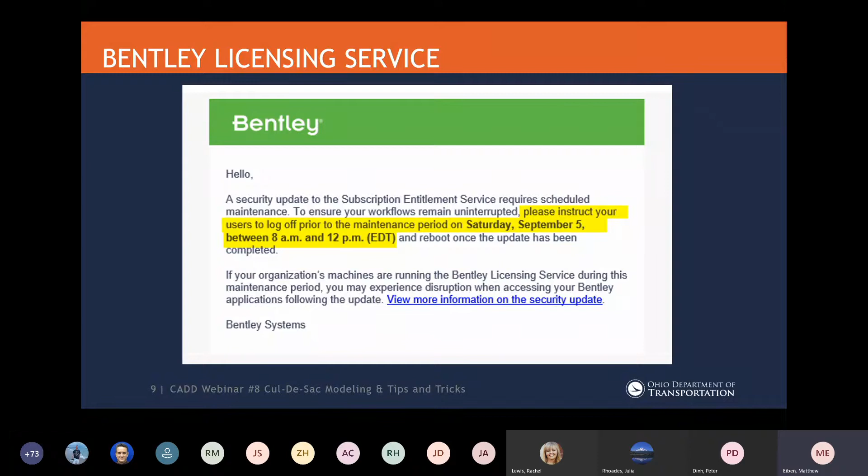Okay, so on to the cul-de-sac modeling. I don't have a whole lot of slides to go through. I'm just going to jump in and show some video here. Just an overview of the tools or the process that I use to create this. Obviously, with ORD, you need your horizontal and vertical geometry for your roadway. Then we're going to have some roadway template and get to that in a second. We'll create a corridor, which I've skipped in this review, but you need a corridor created.

And then what we'll do is we'll define the center of the cul-de-sac. So we'll have some tools that we can use to create that. And then we can construct and profile the cul-de-sac edge of pavements. So we'll create the horizontal geometry for the edge of pavements, and then we'll give them some profiles. And then we'll create a cul-de-sac terrain or surface terrain and apply a surface template. And then lastly, we would apply a linear template for the shoulders and end conditions. So let's get in and take a look.

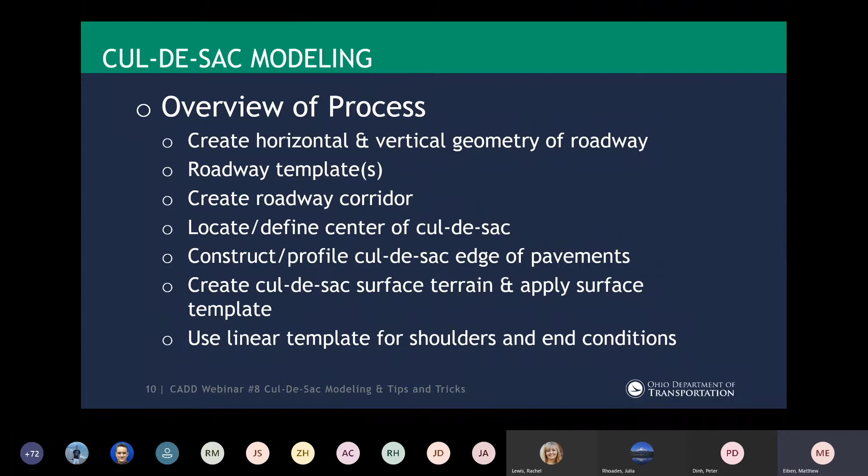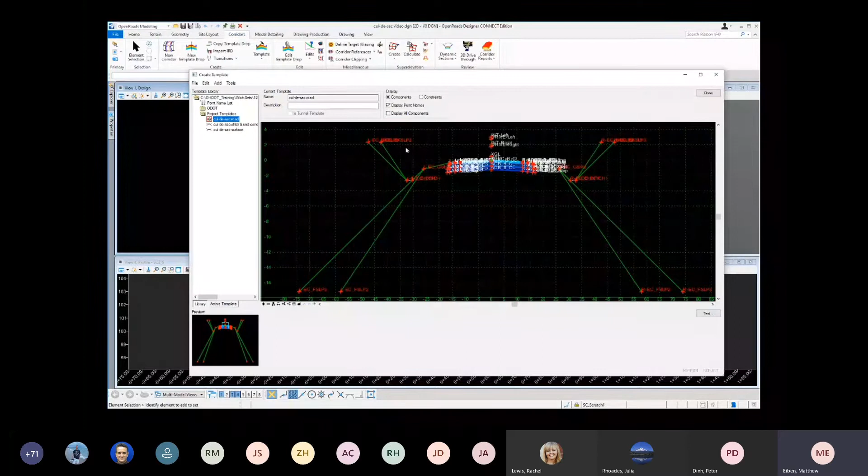We're going to take a look at two different examples, a standard cul-de-sac and an offset cul-de-sac. There are some assumptions being made that you are familiar with the basics of OpenRoads Designer, horizontal and vertical geometry tools, creating and modifying a corridor, as well as creating and using a linear template and a surface template. I've already created a couple corridors and templates that we're going to use. And if we take a look at my template library, I have a simple roadway section, a shoulder section with some end conditions for my linear template, as well as a basic pavement build-up section for my surface template.

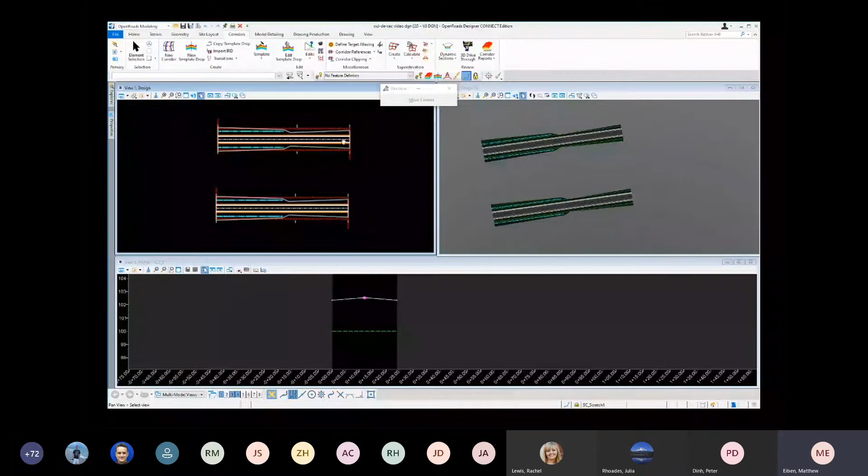So let's get started. I'm going to go ahead and slide my view to the right, where I have two new corridors already started waiting for us here. The first thing I need to do is create a center point for my cul-de-sac. And what I'm going to do is use the geometry point command to place the center point.

So one thing to note is when I do this, the Ohio DOT standard did not have a great feature definition to be used for something like this, and that could be a possibility to add in the future. Maybe some sort of scratch point that's going to be visible. But I'm going to leave this set as no feature definition for now.

And then if I take a look at my active symbology, I'm going to make this something that I can see easily in my view. So I'm going to make it a color of 4 and let's say a weight of 8 or maybe even 10 would be easiest to see. My elevation mode is going to be set to plan element. That way my point will come in at the elevation of the profile along my center line.

So I'm going to go ahead and locate my plan element. My elevation offset is going to be 0, and then I need a data point where I want this to be. So I will snap to the end of my line. And now you see I have a yellow circle in both my plan and my 3D view.

So now we're going to use this center point to create the edge of pavement for our cul-de-sac. And using my feature definition toggle bar, I'm going to set my active feature definition to the edge of pavement feature definition. And now I'm going to use an arc between points. My placement method is going to be a center and a radius, and my radius value is going to be 50.

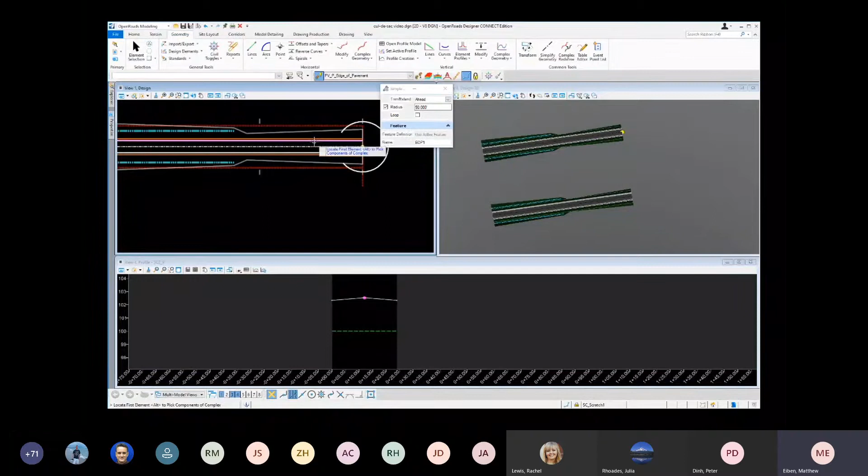So I'm going to accept these prompts, and I'm going to just pick 2 points and create the back part of my cul-de-sac here. Next, what I'm going to do is use an arc between elements, and I'm just going to place a 50 foot radius to connect the two from the edge of pavement from my corridor and the cul-de-sac edge of pavement that I just created.

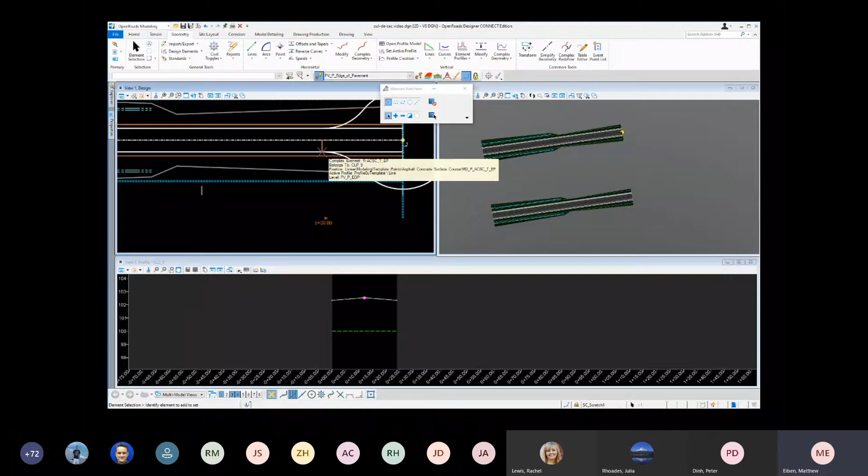And I only want to trim the ahead element here. I want to leave my corridor alone. So I'll create this on each side, and it'll automatically trim back the extra from my cul-de-sac edge of pavement. Now I'm going to just pull back my template drop for my corridor to the beginning of these first radius here. So now it's a little bit cleaner for us to work with here.

Now we need to define profiles for these 3 elements that we just created. So I'm going to start with the back part of the cul-de-sac, and I'm going to open a profile view for it. Although we don't really need to, I just wanted to show what's going to happen when we use the define profile by slope from a point command.

So when I do that, I'm going to define the profile of this point, and I need to select the point from the 3D view now. And I'm going to use negative 1.6% slope. So a profile is created and it's automatically set to active in my 3D view. Next, we'll create a profile for the radius returns that we created.

And then I'm going to use the profile intersection point command to have the edge of pavement of our roadway and the edge of pavement of the cul-de-sac defined in my profile view. And then we'll connect the points to create an active profile for that edge of pavement. So one point is placed here, and then I select the other, and now I have 2 points here. Now I'm just going to use a line between points and connect the dots. And then I'll make this profile active.

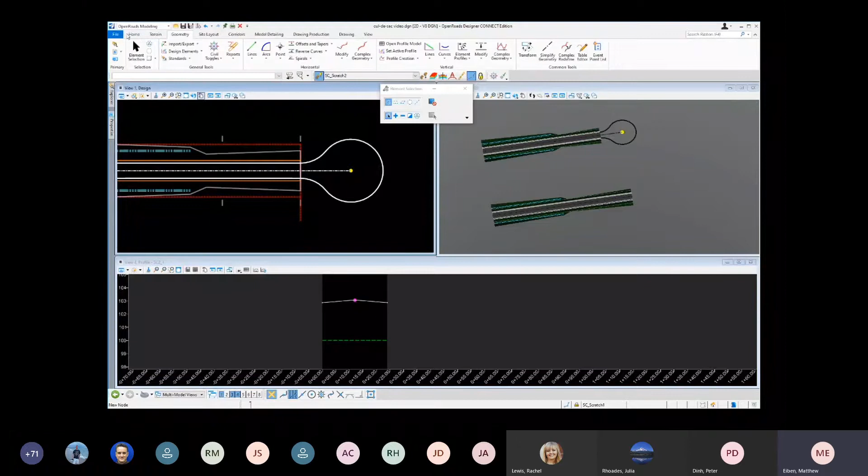So when you use the scratch feature definition, it's a little bit difficult to see, especially in your 3D view, what elements you have here. So one little trick you can do is go to your Home tab and go to Manage your element templates, which is what the feature definition pulls from. If I look at the Scratch 2 element template, it's just all set to the standard by-level symbology.

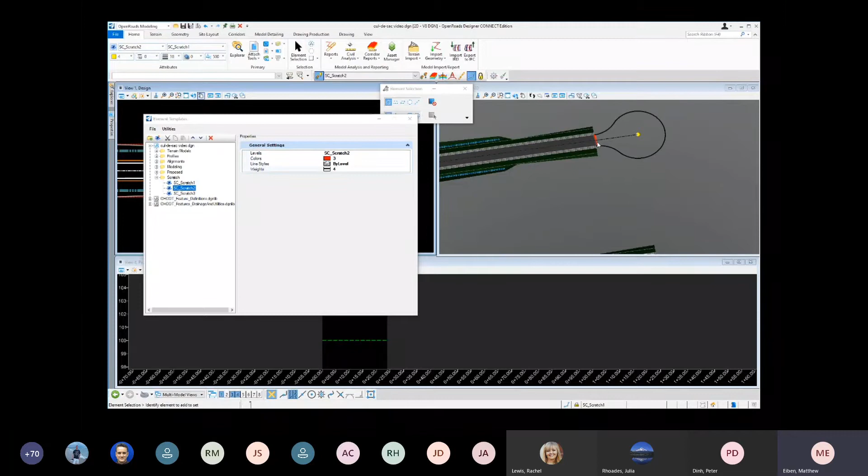So if I change this maybe to red and maybe a weight of 4, so I can see it, we can see in our 3D view that has changed. Just a little bit easier for us to see, as well as in the plan view, it's also changed.

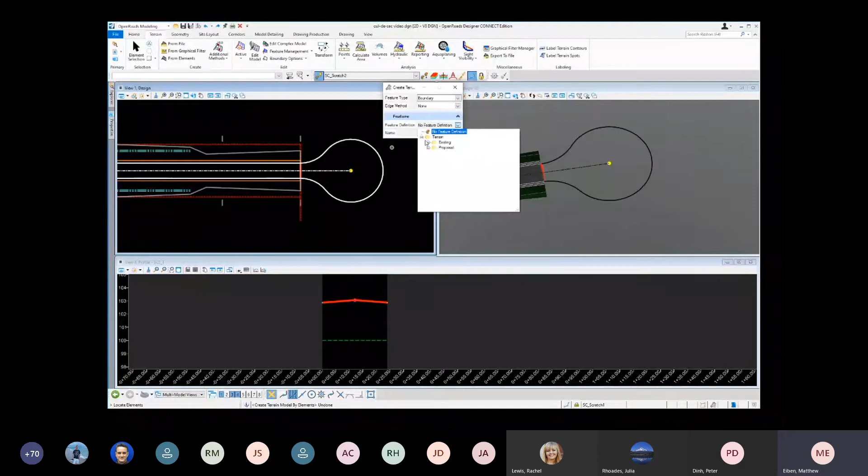And now we're ready to create a terrain of our pavement surface, and then apply our surface template to that to add our pavement build up to apply the depth to it. So we will start by going to terrain and use the create from elements command. My feature type is going to be set to boundary, and my edge method will be none. I also want to set my feature definition to proposed pavement surface. And then I'm just going to select the 4 elements that we just created.

And notice I get a couple contours here, but I still need to add in the break line. My center line is a break line to make the contours appear more like what you would expect to see here. So I'm going to go to feature management, I'll add a feature. From my 3D view, I'm going to select my terrain, and then I'll select the center line to add as my break line. And now you'll see those contours appear much more like what you would expect.

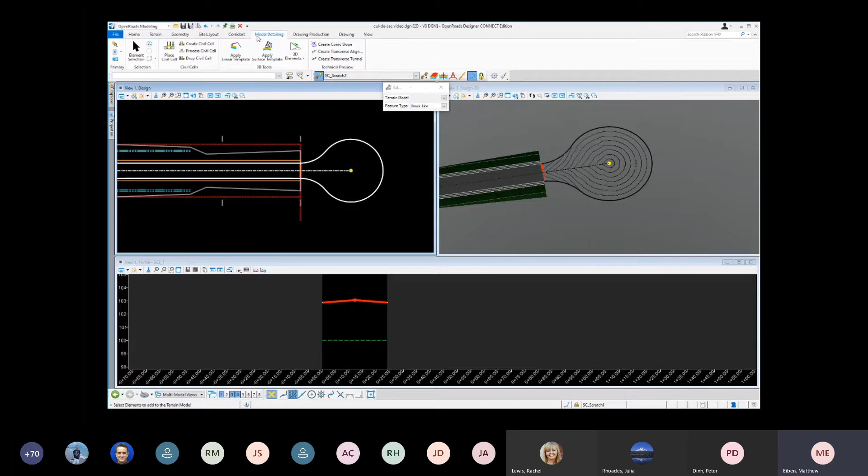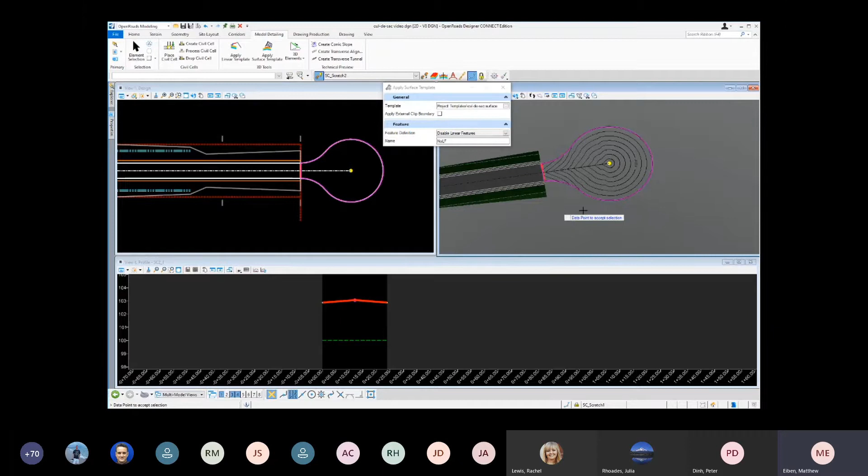So we're almost done now. Next thing we want to do is go to model detailing, and I want to apply a surface template here to apply the pavement buildup to the terrain that we just created. I'm going to use the cul-de-sac surface template in my template library I showed earlier, and from my 3D view I'm going to select my terrain and then just data point through the prompts, and now you can see a pavement buildup was applied here.

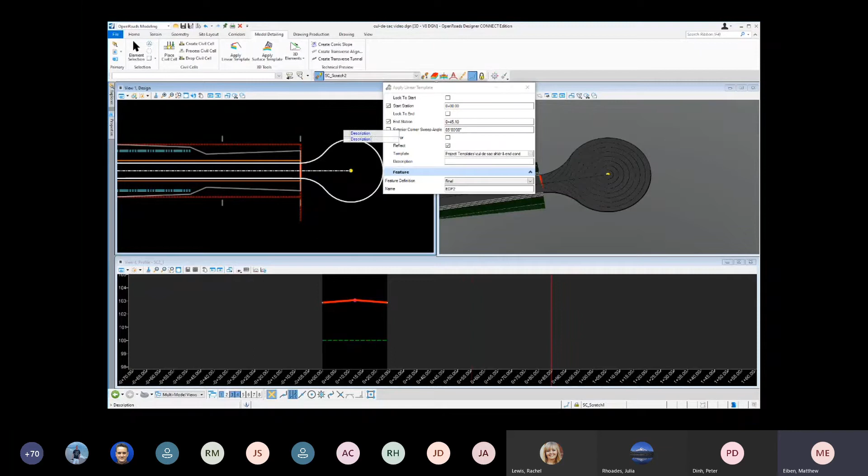The last thing to do to finish this cul-de-sac out is apply a linear template to each one of these edge of pavement elements that will apply the shoulder and the grading end conditions to these pieces here. So there you have a simple way to model a standard cul-de-sac.

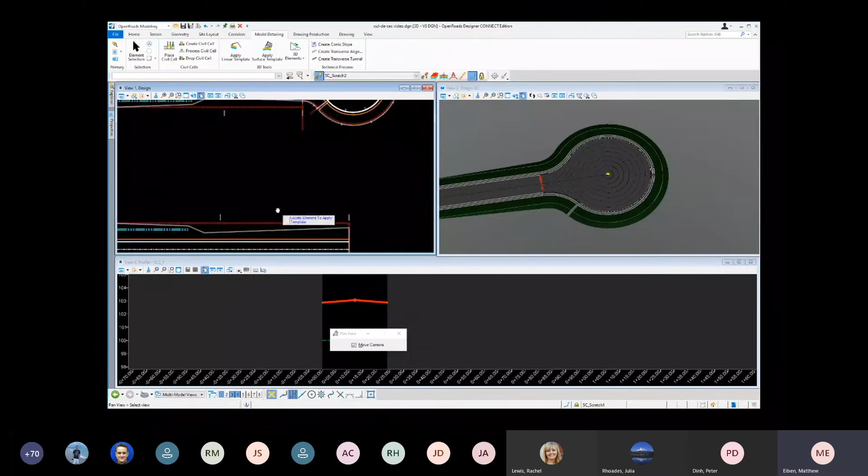So now let's take a look at the offset cul-de-sac. I'll slide down to my other corridor here. The concepts are the same in this case, except what I wanted to show was how to create a little bit of extra geometry needed to create the offset cul-de-sac, that you're also going to need to create the surface template or surface terrain.

So to do that, I'm going to keep my feature definition set to Scratch 2, and I'm going to go to my geometry tab. What I want to do is create a line from an element. I've already populated the dimensions that I'm going to need here. So I'm going to select my center line, and my offset is 0.

I don't really care where I start at this point. You may have a point that you want to start this at. This is going to be where the center is perpendicular to the center line. So you may be able to use Civil AccuDraw to locate your exact starting point. I'm just going to data point a point here, and I want it to go to the south, so 270 degrees, and I want it to be an offset of 38 feet.

Now I'm going to place an arc between points, and I want to set my method here to start and end, pass through. And then I'm going to snap to the end of this line, and I'm going to work backwards. And my radius value here is going to be 143 feet. And then my endpoint, I'm going to use a tangent snap, make my endpoint tangent to my center line. And then I'll data point through to place that.

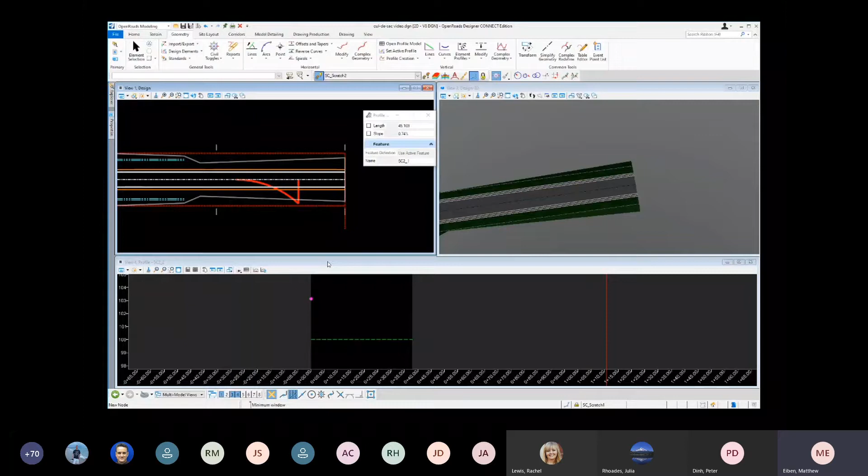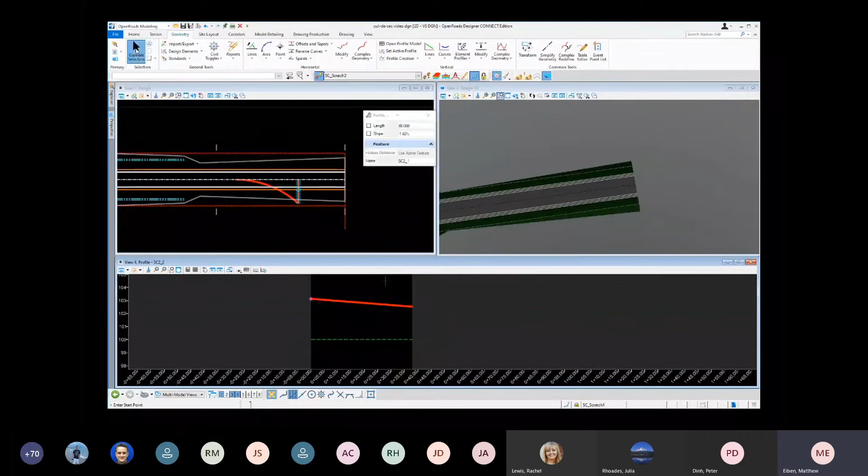I'm going to create a line beginning at that point, and I'm going to do it by a slope. So my end station is going to be 0+38, and I want this to be negative 1.6%. So then we'll set this active, and we'll create a profile now for our arced element here.

And again, I'm going to use the profile intersection point to create my centerline point as well as my offset point. Oops. And then I'll set this active as well.

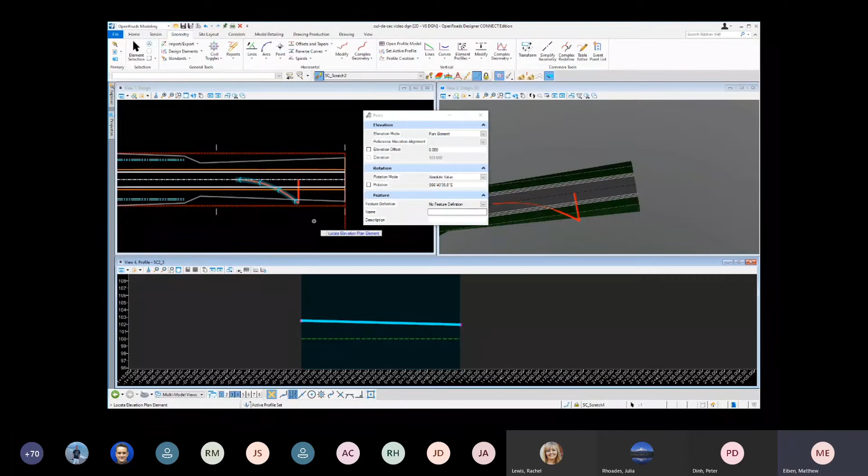And then the last thing we can do to create our center point is use the point command. And again, this is set to no feature definition. And I want to set this at the end of that center line. So now I have my center point. That point will then be used to create the profile for the cul-de-sac element, or the edge of pavement element.

Now I'm going to go ahead and create the edge of pavement components or elements here. So I'm going to set my feature definition back to the edge of pavement, and I'm going to use the same commands I used previously. I'll do an arc between points. Again, I need to change my method back to center radius, and my radius value I'll set to 50. And then I'm just going to snap to the center point. I'll just pick 2 points to create this.

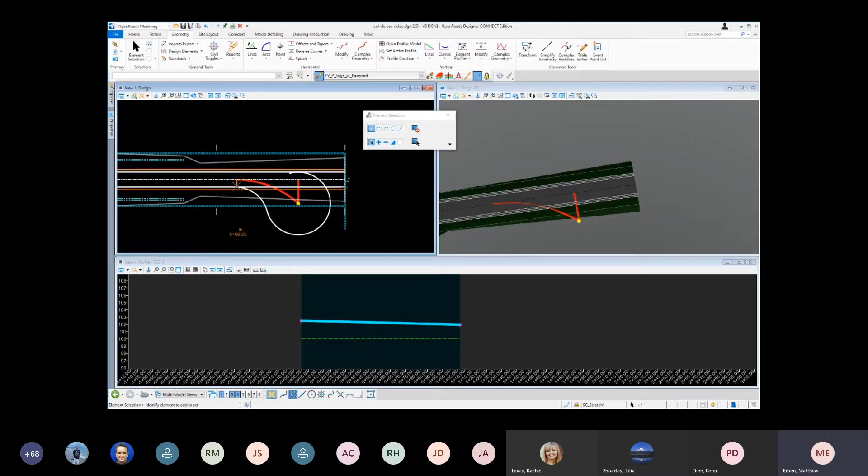And then I'll do a simple arc between elements. And again, I'll use a 50-foot radius here. Select my edge of pavement from my corridor, and then select the cul-de-sac edge of pavement. And I'll trim the ahead part of it. Now what I'm going to do is move back the corridor to the beginning of this radius, which leaves us one more edge of pavement component that we need to go ahead and place.

So what I'll do here is I'm going to use a single offset partial, and my offset value is going to be 12 feet, the same as the lane. I'll select my center line, I'll select my begin point, and I'm just going to extend it beyond the cul-de-sac there. Then what I can do is go to the drawing tab, and I can just use the MicroStation extend elements or trim elements, and trim those two together.

Then I'll also just go ahead and create the last piece that we needed to create our boundary for our surface terrain.

Okay, so now we have our horizontal geometry all created. I've started a profile for my boundary point there. And now let's go ahead and profile the edge of pavement elements. And I'm going to go ahead and set my feature definition back to edge of pavement. And then, again, I'm going to use the define profile by slope from a point. And I need to select my point from the 3D view. And again, I'll use a negative 1.6%. Now I can do the same thing here.

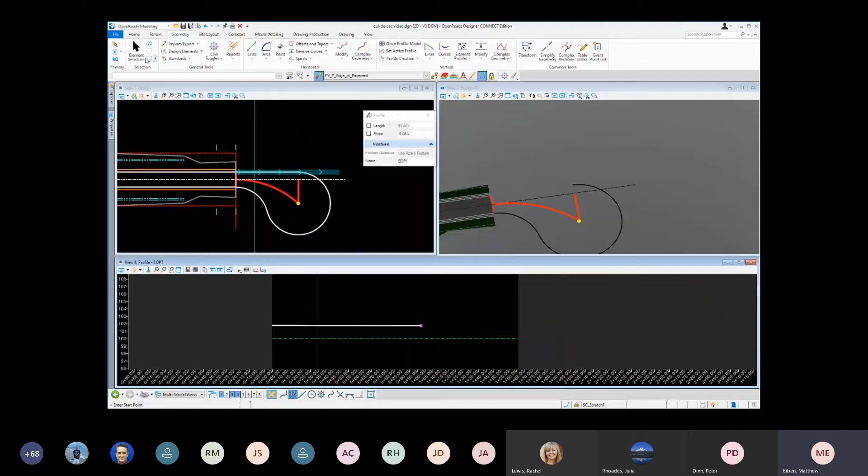Okay, now that we have all of our edge of pavements and our break lines are profiled, we can go ahead and create our surface terrain. So we'll go to terrain, create, and go to from elements, and we'll select the edge of pavement and our boundary line here. Again, feature definition is set to pavement surface, and my feature type is set to boundary.

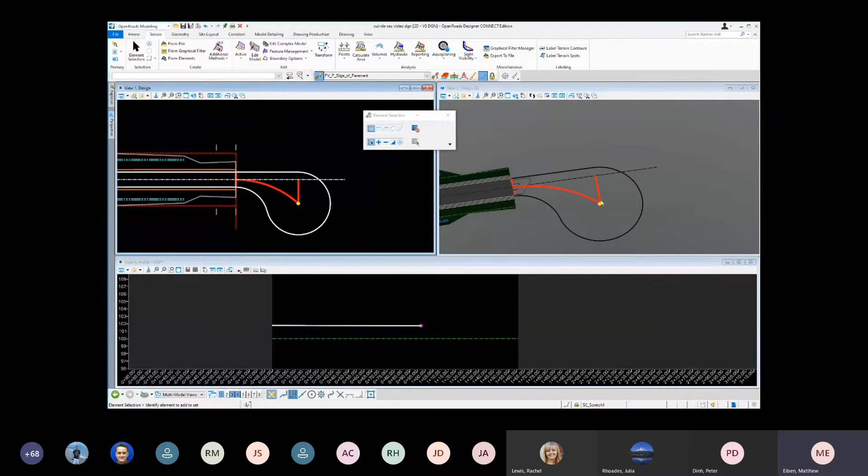So now you see a couple contours were created, but we need to go ahead and add in this last arc as our break line. So we'll add a feature, select our terrain, and then locate the break line. So there our contours look nice and smooth like we would expect. And then to finish the rest of this out, we will apply our surface template for our pavement buildup, and then apply a linear template for the remaining elements for our shoulder and our grading.

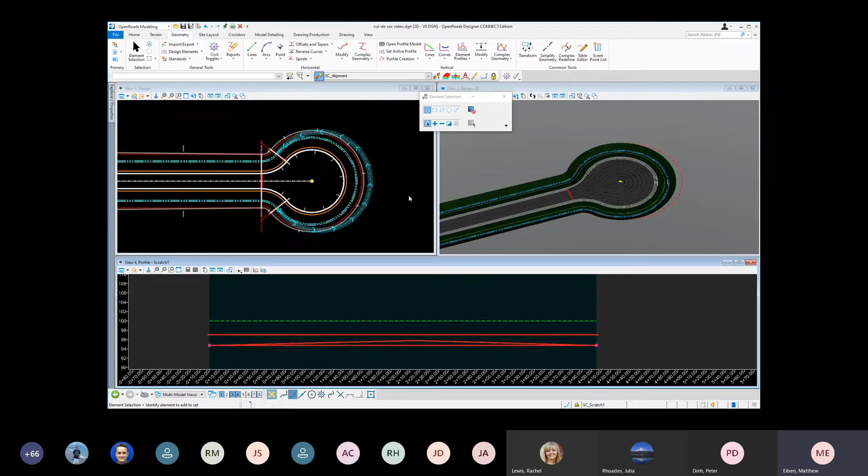Next, what I'm ready to do is go ahead and add a point control to control this both horizontally and vertically. But before I do that, I need to go to corridors, and I need to add this as a corridor reference so that the corridor knows that it's there. So I'm going to locate my corridor, and then I'll select the reference element, and then I'll just reset to complete it. So that process is pretty quick.

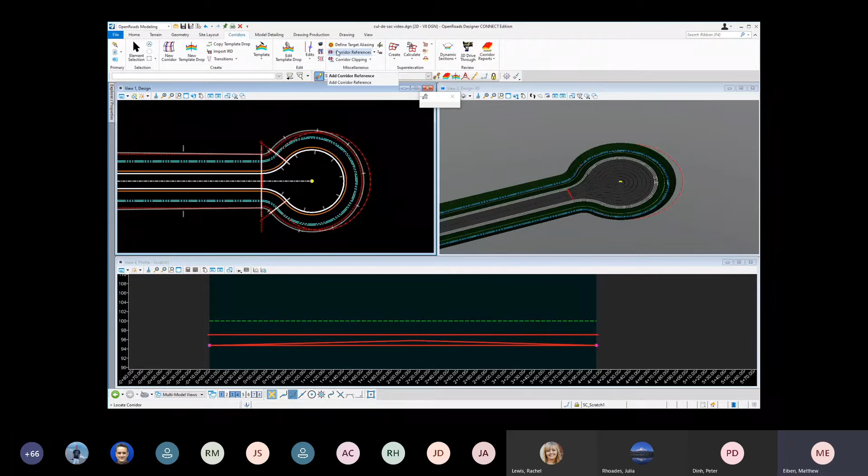In this scenario, if you had a bigger project, you might see it take a couple of seconds, but we can double check that it's there by going to our corridor objects. And if we just select or locate the corridor and look at our external reference, we'll see that that corridor reference was added in. And again, if we use a correct naming convention or something that makes better sense, we'll obviously see that name there

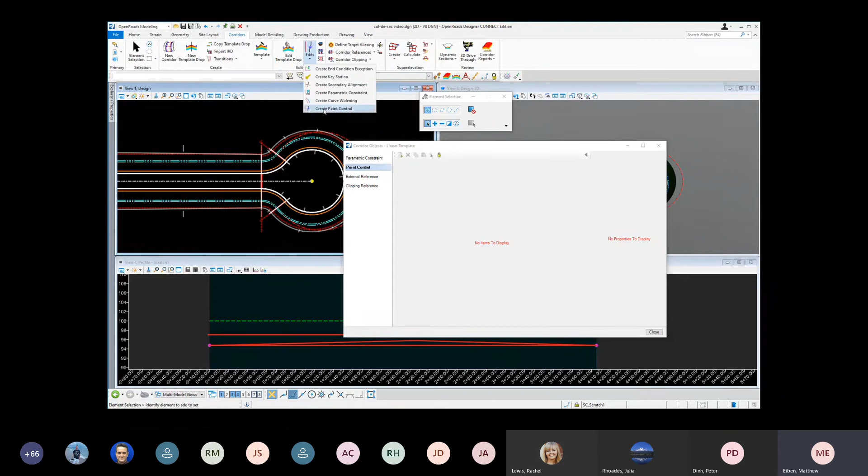as well. And while I'm here, I'll just point out that there's no point control here, and I could go ahead and add that from this dialog, or I can also go to my edits command and click on create point control. So I'm going to just do it from this dialog. And this is already set to lock to start and end for me. So I'm just going to keep those as I want, and then you can add a description as you feel necessary.

I want to locate my point now. This is the point from the template or from my end condition that I want this point control to control. So I want the inside ditch line, and notice in the dialog then the point is populated here. You could also pick from the drop-down list. Generally, it's going to be easier to locate it in plan view if you can.

Now I want to control this both horizontally and vertically. So the mode here is going to be both. Again, you can select from the drop-down horizontal or vertical. So I'll data point to accept that, and I want this to control it by linear geometry, and then I'll data point here. You have some other options such as a feature definition or corridor feature. We're going to use linear geometry here.

Next, it's asking me to locate my plan or profile element. So I'm just going to select in my plan view my new geometry here. And since my active profile is defined as scratch 3, I can just data point to accept. And once that plan element was selected, it was also populated in the dialog. And again, you could select from the dropdown and pick any of those.

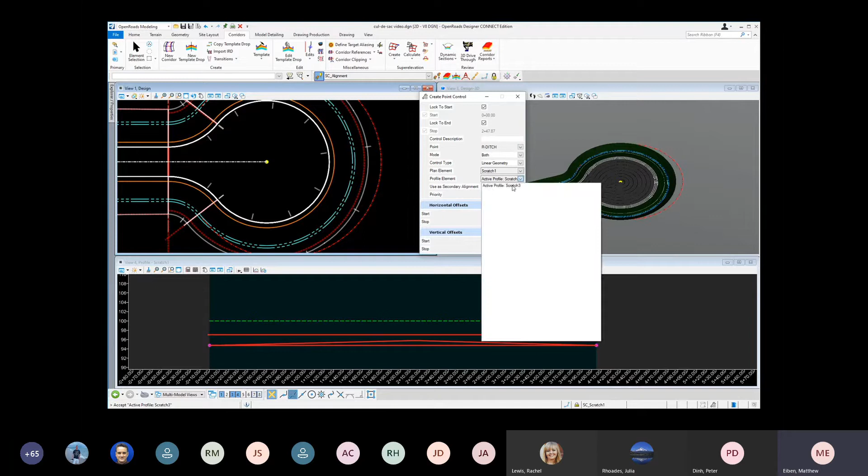And then once the plan element is selected, the profile should populate here or give you whatever options you might have. So we're going to data point to accept that. We don't want to use a secondary alignment, and the rest of these prompts I'm just going to data point through to accept. I don't want any horizontal or vertical offsets.

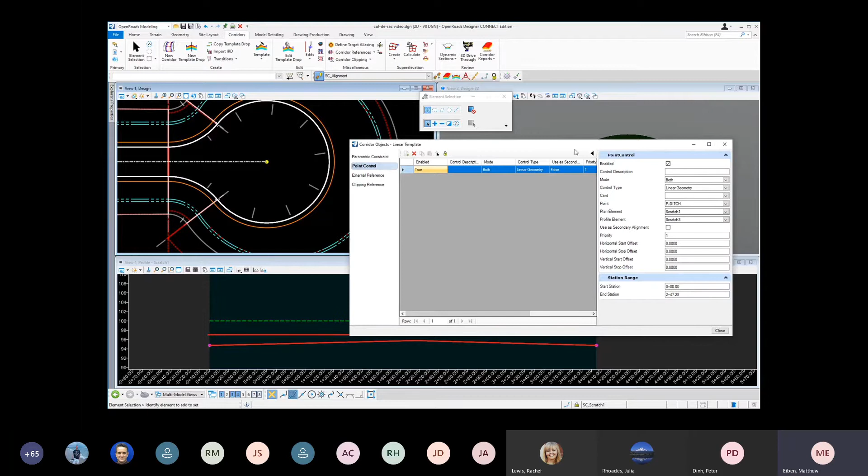So we'll see now in our corridor objects dialog box, our point control was added, and we can come in and review any of these, or we could even change any of them, or even just toggle it on or off if we didn't want to see it. So that's what I'm going to do here. So I'm going to toggle this off. I'm going to go back to our original condition, and then when I toggle this back on, you can see that my ditch was adjusted both horizontally and vertically to follow that scratch alignment that I created.

One last thing that we can do to take a look at this is if I open a cross-section view, and I'll just start a new cross-section view. I'm going to locate my corridor, select my view, and if I kind of scroll through these, you'll see that my ditch was adjusted, and because of how far this is away, obviously that really flattens out that slope there. And then we can see as we get back around the other side, as it starts coming back in closer, it looks more like what you might expect.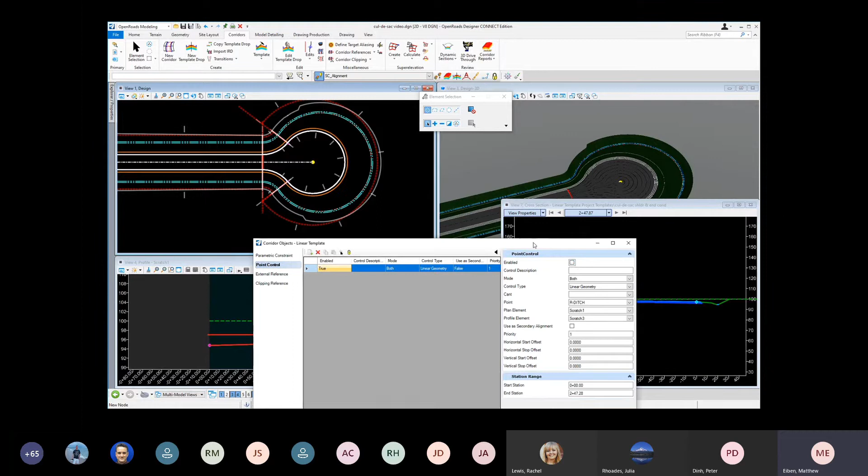Last thing is, in our cross-section view, let's say we want to toggle that point control back off. We can see, and then scroll back through our cross-section view, you'll see that the normal condition is there.

So that's one way to show or modify a ditch. And this can be done not just on a cul-de-sac, but really any corridor that we have, we can apply a special ditch profile by using the similar commands.

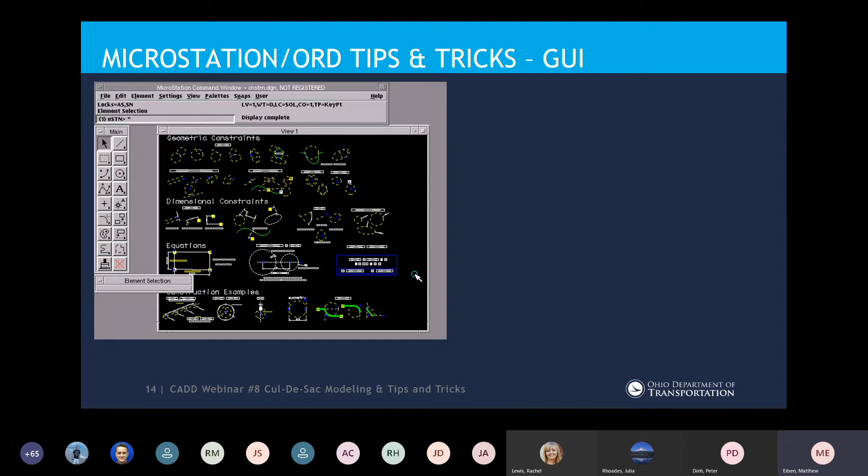Here we got a nice screenshot, and this goes back quite a while. The graphical user interface has come a long way over the years. This was the earliest screenshot I could find from version 5 from back in the mid 90s on a DOS operating system. It happened to be the first version I briefly touched until MicroStation 95 came out, which was like version 5.5 on a Windows operating system. So that was that there.

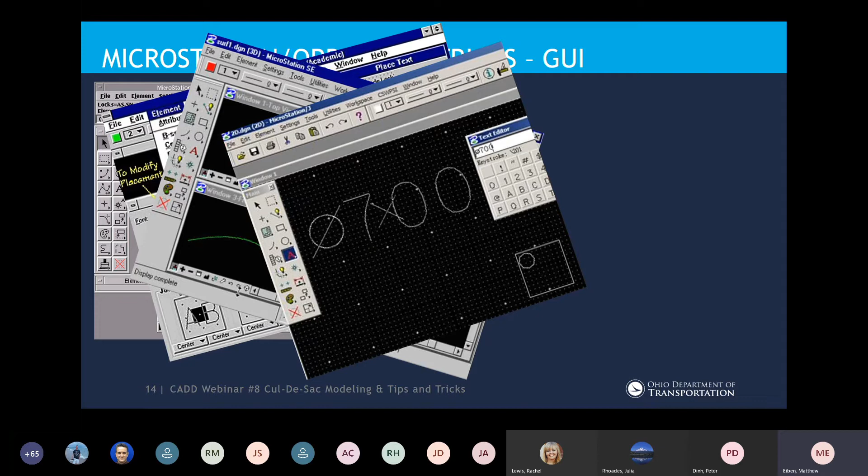And then we had MicroStation J, or version 7, and the interface mostly remained the same in all of those versions. There's SE, then J, and then we get into the 2000s. We had version 8.1, which I couldn't find a good screenshot of, and then 8.5, which is also called the 2004 edition, followed by 8.9, which is the XM edition. Again, the interface mostly remained the same, with the main toolbar always docked over on the upper left.

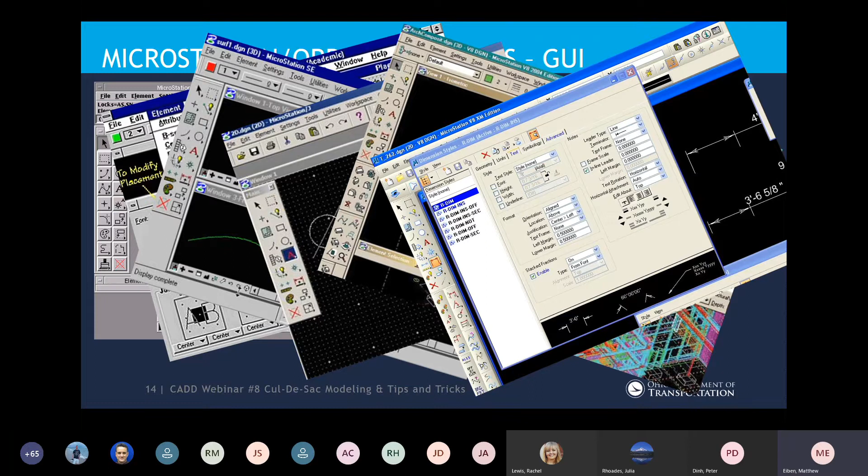And then finally, we get to V8i, where the main toolbar was still available, but largely replaced with the task toolbar, which is what I think most users will recognize prior to Connect Edition products. So now we have the ribbon interface. But why do I bring all these up? Just to show the progression of the interface, the task dialog, the ribbon interface, which brought the biggest change and seemed to worry and frustrate users.

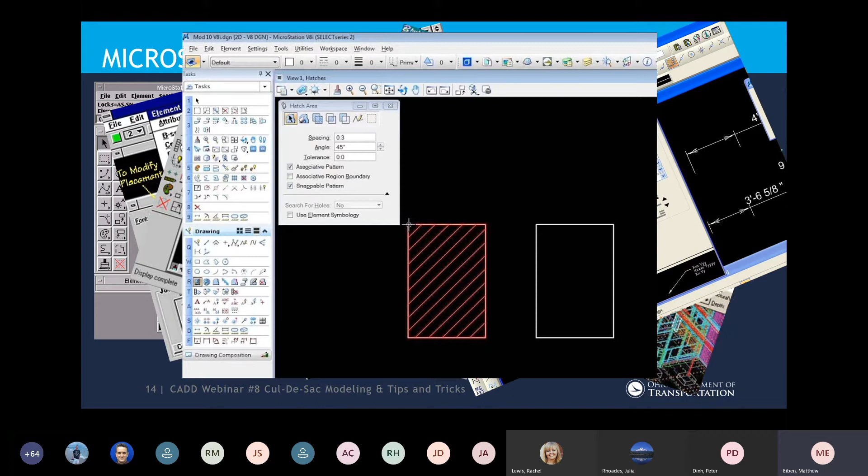They feel like they won't be able to be as productive, they might have to find where things are at. So I'm just going to show a couple of tips and tricks for MicroStation. When I say MicroStation, that also includes ORD as well. So hopefully you learn something new, or maybe it'll just be a refresher. So the first one here.

Now let's say you're working on your model, but you just want to place a cell real quickly or something, maybe place a line, and you don't know where the cell command is, you don't want to navigate away to go find that. So you can use the search ribbon in the upper right for a couple things. When I type in cell here, you'll see it shows me where the cell command is located.

In this case, I have 4 different menus. By clicking on one of them, it'll take you to where the workflow is located. And we can also use the ribbon just to activate the command. So if I select on the cell here, it'll bring up the cells dialog.

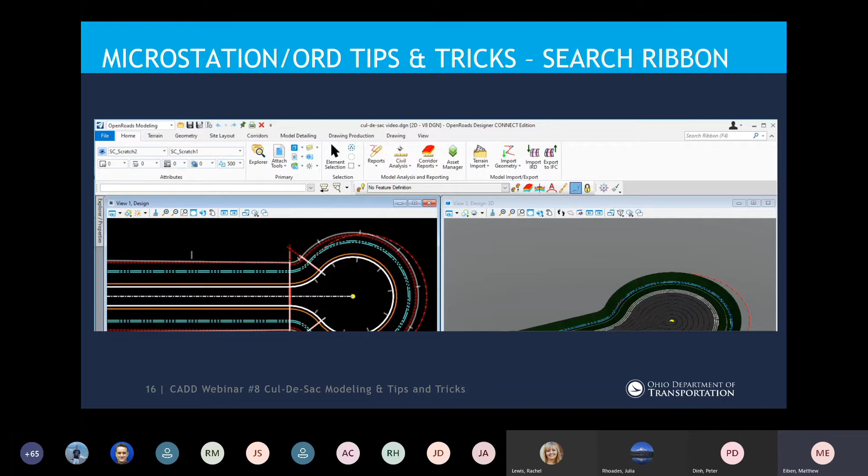And I don't show it here, but there was also a history that will show your list of recently used or your searched items that you can go back to and look for later. So the search can be helpful in a couple of different ways. You can find a command to either open it directly or to find where that's located in the ribbon menu there.

So now we've talked about searching by a KEYIN. Let's take a look at some actual KEYIN commands and shortcut KEYINs. What I'm talking about is actually using the KEYIN dialog box and not necessarily keyboard shortcuts like Control E or any of those sorts of things. So I did just want to share these, give you another way or ways to navigate and potentially avoid getting lost in the ribbon. In some cases, you might find some of these KEYINs helpful, other you may not.

Generally speaking, KEYINs aren't used as much as they were by users in the past, and why is that? It's just as we looked at earlier, the graphical interface of the new versions has improved, and users generally have learned where their top 20 commands or so are, so they're comfortable finding those and may have even customized their user interface, whether it be a custom toolbar or just docking the toolbars they use most often.

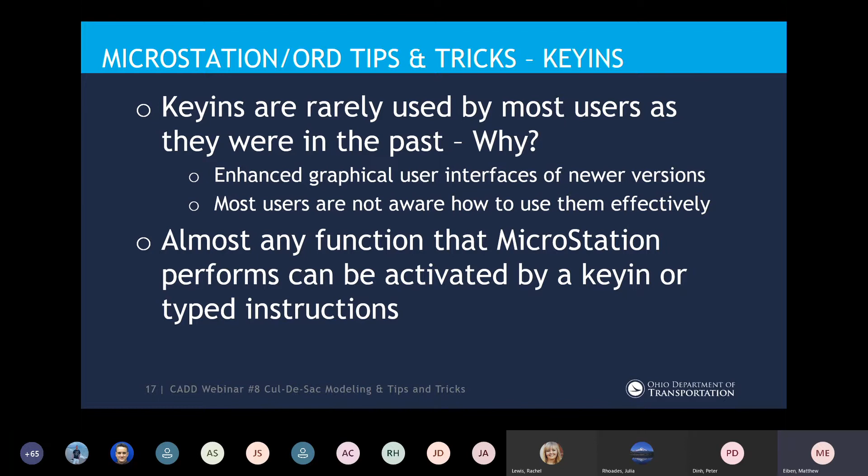But I'd also say most of the time, many users that I talk to don't really know how to use KEYINs effectively. So just about any function that MicroStation performs can be activated with or manipulated with a KEYIN. And when might you use those? It's going to be definitely useful as you do repetitive tasks. And we can also use KEYINs to take advantage of shortcut KEYINs, which are reduced to 2 letters. So we'll look at a couple of those here in a minute.

And we can set commonly used KEYINs to function keys to further increase your productivity. So if you always use 1 or 2 commands, we can find the KEYINs for that and set it to a function key or even create a custom menu. You can also search the MicroStation Connect online help for a list of KEYIN commands with the link that's here.

And what I show here is all the Bentley help content is now online rather than built into the product. So you can use that link to get to the product documentation and choose the product you're using. I've noticed in general, for MicroStation commands or KEYINs, the documentation is much better using the MicroStation help rather than the ORD help, even though ORD is built right on top of MicroStation.

So KEYINs can be combined with a semicolon, so we can do several things at once. KEYINs individually or combined can be used in a batch process. I'm not going to talk a whole lot about that though today. So alone or together, for someone like me who really isn't a programmer, you might find something that you do a lot can be combined and automate your workflow with your own little script.

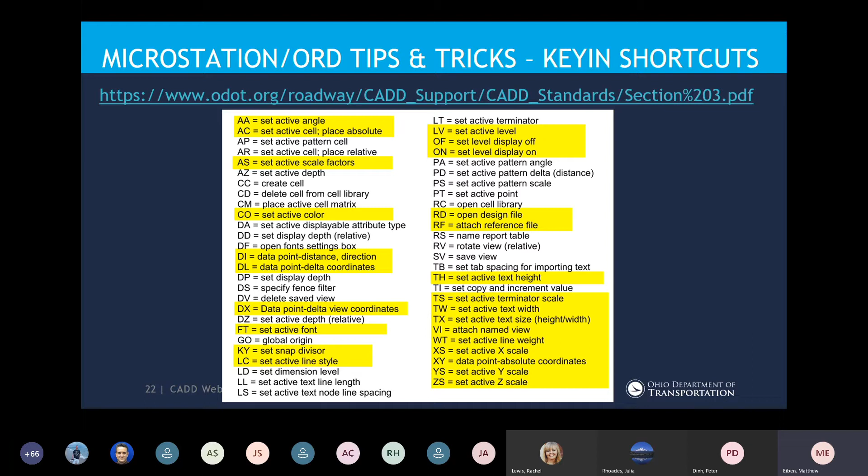The highlighted shortcut KEYINs are what I'd say are probably the most frequently used. Some of the text and symbology ones may not be used as much with the text styles and by-level symbology that are used today. But there are cases that could still be useful. Say in that previous demo I did where I was placing the center point and I would change my color, I could use some of these shortcuts. So CO equals color 3 or 4 or whatever the color was I used.

We also have KEYIN precision inputs such as DI=, DL=, DX= and XY=. So there are various ways to achieve these, especially with AccuDraw, but I still find myself frequently using a lot of these commands. These would generally be used with basic MicroStation elements, but do also work with ORD's civil geometry.

So looking at each one individually, DI= will give you your distance, comma, your direction. So in that example I showed is 124.54,270. Let's suppose I'm drawing a line and it'll draw a line 124 feet long and 270 degrees, so it'll be straight down. DL will give us our distance along our x-axis, and oops, there's a typo there. It should be distance x, comma, distance y for both DL and DX.

So DL will work along the design plane axis, but if you're in a rotated view, you're going to want to use DX. So that'll work along the view axis there. So if I were to draw a line in both of those examples, it would be 100 feet along the x-axis and 45 feet along the y.

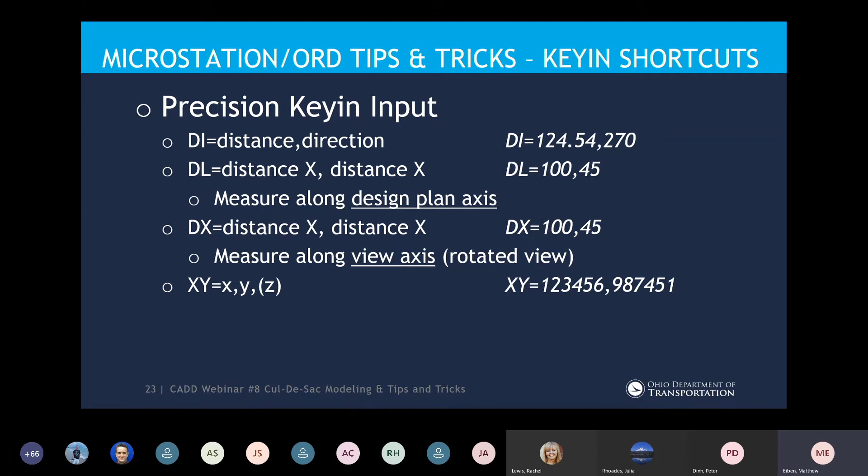So these might be kind of old school for some of you who may have been around for a while, but if you're new, I would encourage you to look at some of those. And lastly, a lot of, if not all, the ODOT custom applications, if you look in the help documentation, there are KEYINs to also load those. So in this case, MDL LOAD OhioDOT SheetManager will load in the Sheet Manager application.

So again, if you find yourself using one or two of those more often than the others, and you want to set that to a function key, that could be how you could do it. Typing that each time may not be worth it, so you may just navigate to the menu at that point. But I have a couple examples. Let's just take a quick look. I'm going to start by looking at a couple KEYIN shortcuts.

Let's look at the level symbology first. So if we look at our active symbology, everything's set to default at the moment. So if I use LV=SC_Scratch2, for example, see that my active level is now changed to scratch 2. Now, if you look at our color, weight, and line style, we'll see those are all set to by level. So that automatically changes when we change our level.

But maybe there's a case if we're doing a public meeting exhibit or something, and maybe just on a scratch level, you wanted to change the color, for example. We can just do CO=3, and that'll change our color to red. We can even do LC=3, and that'll change us to line code 3. And we could do WT=5, and we'll see that our active weight is now changed, and we can draw lines or do whatever we need to do from there.

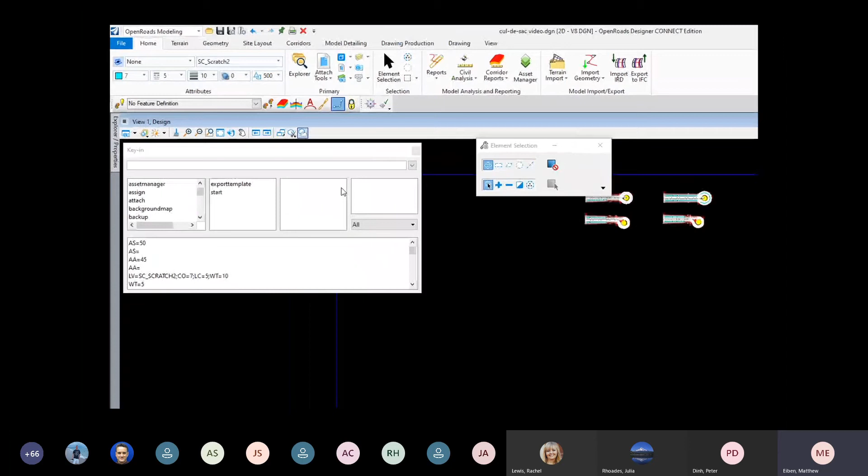I have this all set to all caps just so I can demonstrate what I'm typing in versus what's auto-completing here. As I begin to type place for the place line command, you'll see that that word is auto finished for me. So all I have to do is hit the space bar. Now I can start to type line, and then hit space bar to finish the line word. So I just typed in PL space LI space, and now I'm in the place line.

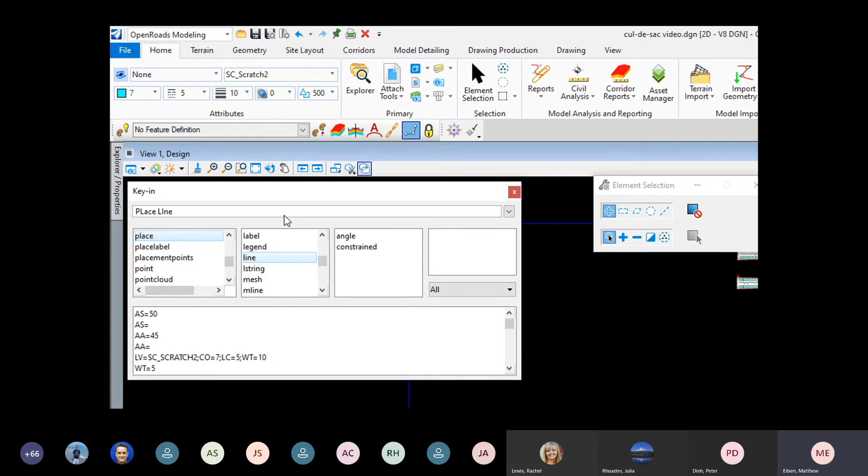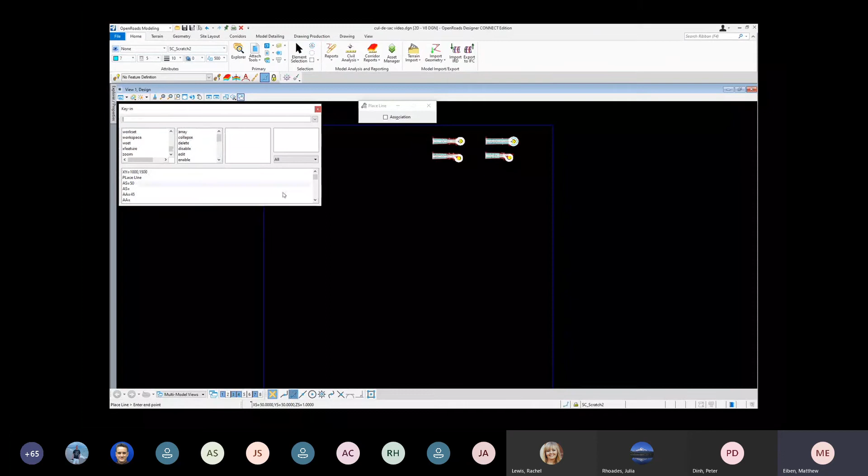I'll hit enter here. I'm automatically in the place line command, and it's asking me to enter my first point. I could data point on the screen here, and then data point twice to place my line. But what I'm going to do is use some of the precision inputs that I talked about earlier. So I do an XY equals, say 1,000, 1,500, and then press enter, and that's going to set my first point of my line.

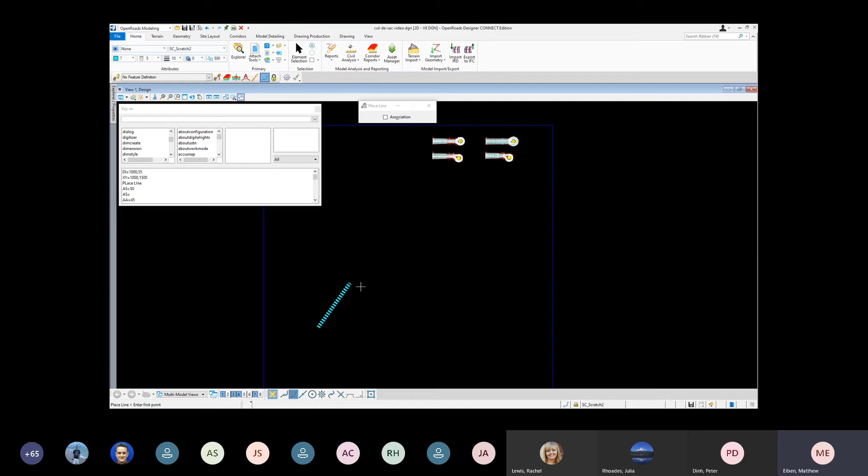And then maybe I don't want a data point just to end it, and I want to do another precision input. I could do a DI equals 1,000. So I want a 1,000-foot long line drawn at 55 degrees, and I've placed my line there. Now I'm going to place another line with 2 points here, and then maybe I want to trim those together. So I'm going to use the trim command, and I'll trim one of these to the other one.

We could also do a trim to intersection, where it would trim both lines together as well. So with what I just did there, I placed 2 lines and never really had to navigate away from the ribbon settings that I currently was looking at. So hopefully you'll find that useful, with less clicks to move around and locate the commands that you want.

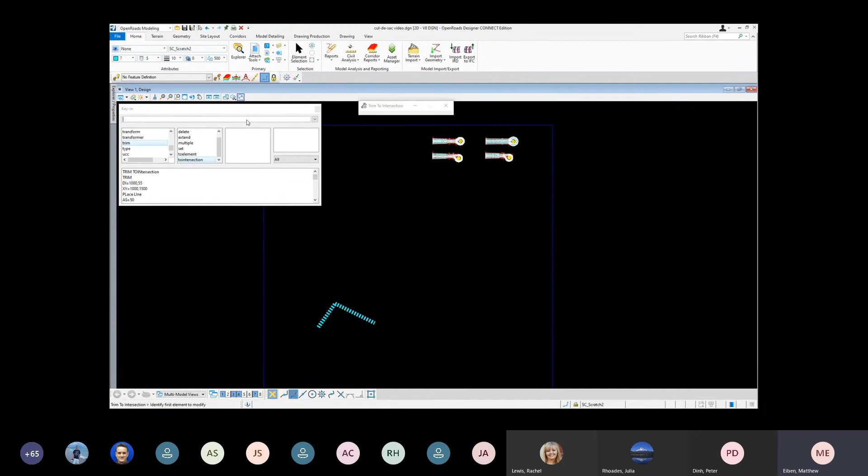There are a couple commands that I've never been able to find an actual icon for, and it actually stems back to days when we had some digitizer tablets with some menus on them. So I do use these quite frequently. There's two of them, and they're pretty much the same command, but it's construct perpendicular to and from are my options.

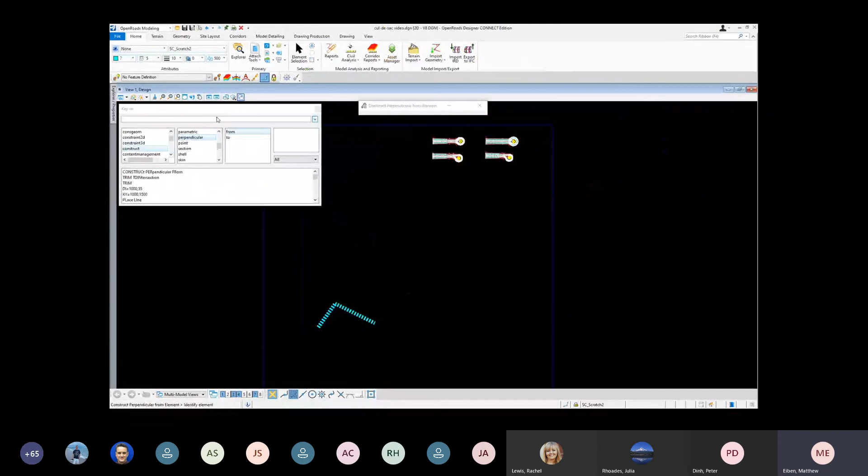So if I want to create a perpendicular line from an element, I can enter that in, select the element I want to draw it from, or snap to the beginning and end, and I have my perpendicular line. Let me place another line. Oh, actually, I can just do it this way. I can do a construct perpendicular to, and I can just data point to begin somewhere out here. Oh no, I need a data point on one of these.

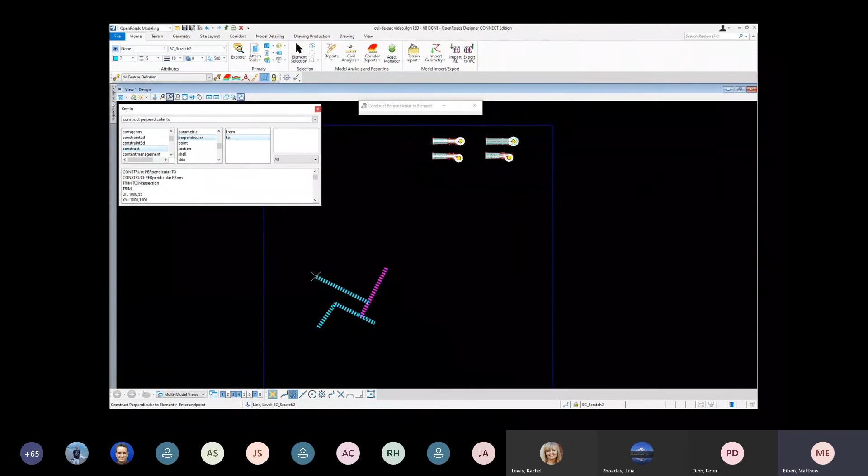And so it'll be a perpendicular line from the first element I select to wherever the second point is that I might select. And maybe that is the middle of this element. So those aren't on any particular toolbar that I've ever been able to find. So if you find one of those, let me know.

Another shortcut key I wanted to share is that we could also do an active cell. So maybe we wanted to add a couple cells in our file, but we didn't want to have to navigate to the cell library that I showed earlier. By the way, before I get there, we also looked at using the search ribbon to find the cells dialog. I could also key that in with dialog cell. That will bring up the cell library dialog, just like we looked at earlier. That really wasn't where I was going with this, but if we notice when I did do that, there's no cell library attached.

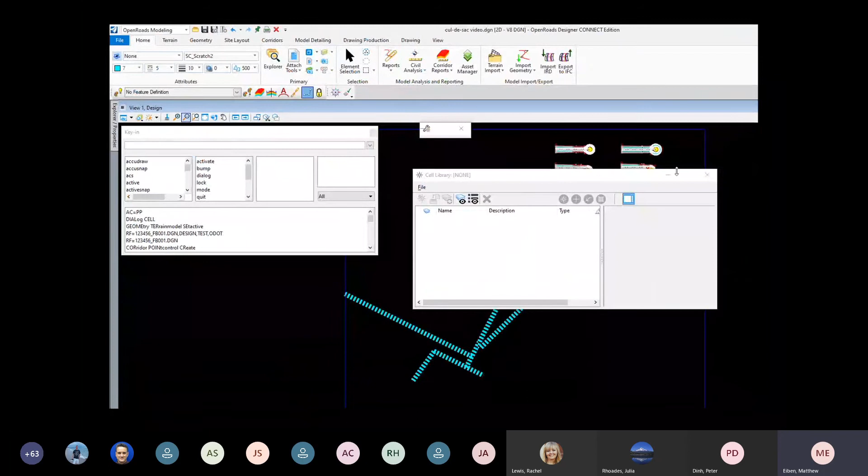So even without a cell library attached, I can key in AC for active cell, and maybe I want to place a power pole, which I know the cell name is PP. I can AC equals PP and press enter, and there I have my power pole ready to be located. And if I did not like the scale of that, I can do active scale equals 20 and get that back to where it needs to be for my particular drawing.

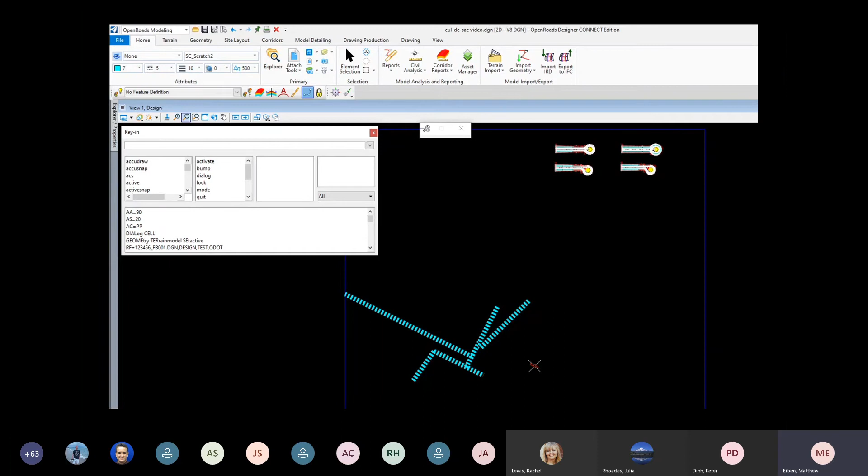I can even change the active angle with AA equals, maybe say I want these all set to 90. So you'll see the cell was rotated, and now I can place it in my file. And lastly, again, I could use one of the precision inputs to place it at maybe XY equals, say 2500, comma 2500.

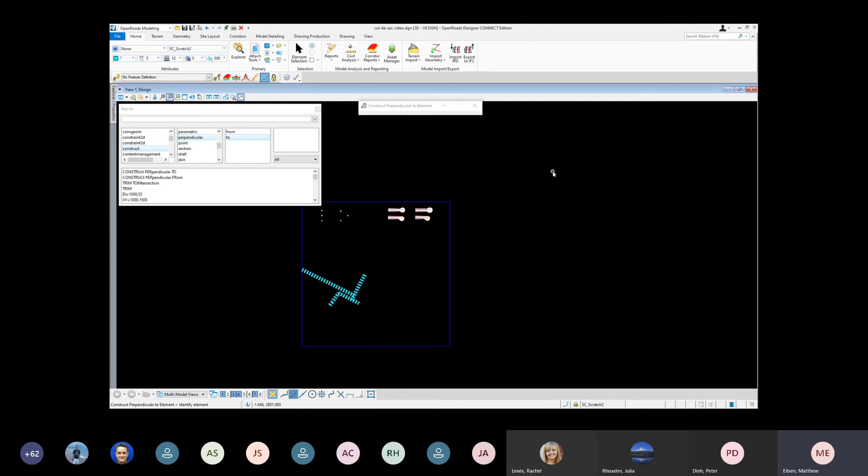ORD civil geometry also has some key-ins. Some are rather lengthy, and you may not find them as useful just because it is a lot of keystrokes to get those in. But if you are doing a repetitive command or using it on a function key or something like that, you may want to be aware that those are there. So just as an example, if I key in geometry, line, and then place, I'm going to do a line between 2 points.

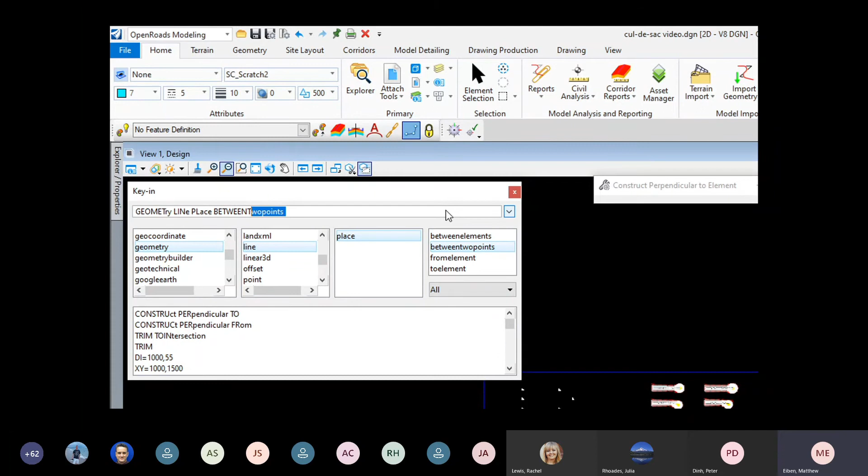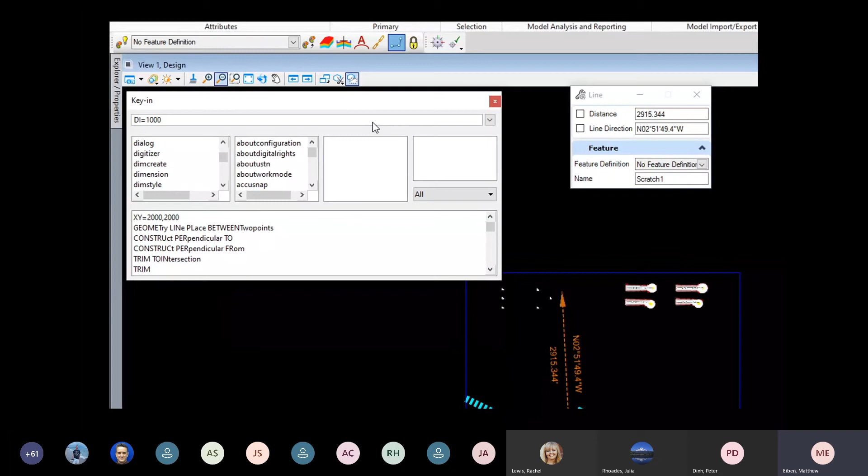And then I can use the same precision inputs that we used earlier. For example, if I do XY equals, and I'll use different values, 2000, comma 2000, it will begin my line here. And then maybe I just want to make that line be 1,000 feet long and at 45 degrees.

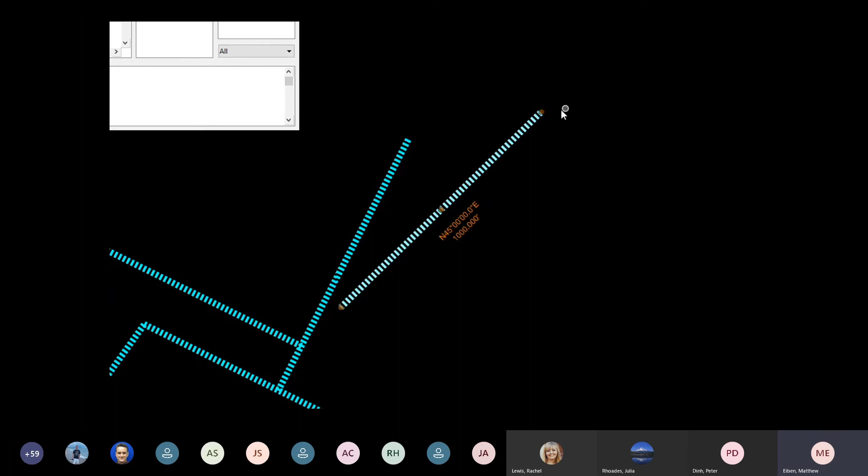So now if I select that line, we'll see that our civil geometry was created, whereas these are just regular MicroStation elements. I probably should have changed my color there, but you get the point. And then we have the same handlebars and those sort of things. So that could be useful in cases where maybe you just wanted to place a quick line or something like that, and you didn't really want to toggle on your civil AccuDraw, or maybe you're more comfortable using the key-ins as inputs.

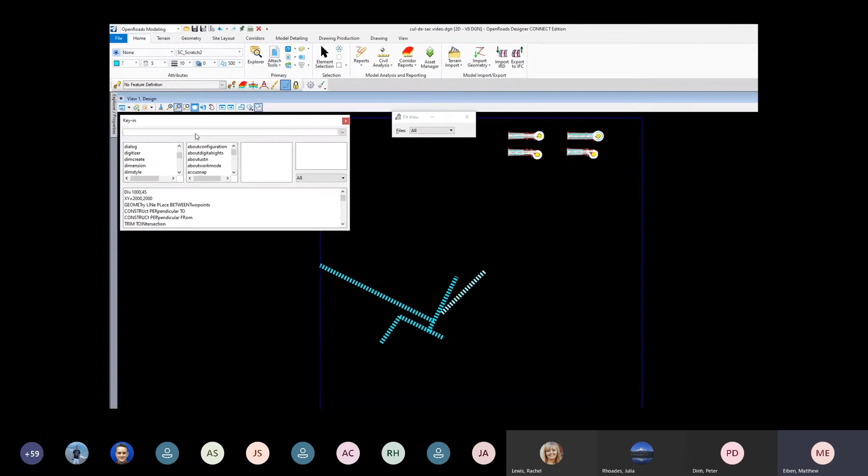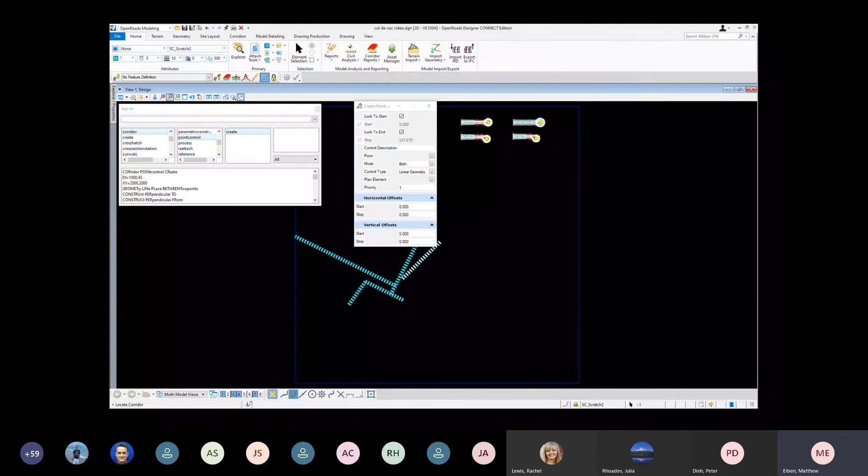So in line with the ORD civil geometry key-ins, if we wanted to do a corridor point control, we can do corridor point control create, and that will bring us into the create point control dialog. So just some ways to, again, possibly speed up your workflow or maybe add some other features to the way you work.

You can also use a key-in to attach a reference file. So we can key in reference, attach, and then we would key in the file name, and we could have that attach the reference file to our DGN that we're working in. So that's one way to do it.

There's also a shortcut that we can do: RF equals and key in the file name .dgn, and that will do the same thing. There are some additional options that can be added when using this KEYIN, and you would separate those with commas. You could specify the model that you would attach. You could add a logical name, a description, what view you want it to attach, the scale, whether you want live nesting on or off, and whether you even want the display of that reference file turned on or off. So you could actually attach it, but have it turned off in the display.

The order of those is important, but I'll let you look up the help document if you want to learn more about those. And I'll show just one quick example in a second. In general, you'll probably find RF really handy, especially to attach a fieldbook file. The caveat here is that the MS_RFDIR variable must be defined in your work set. And maybe we should even look at adding that to our overall Ohio DOT config file, so that it would point to the folders where to find a DGN file. So I have that set in this data set here.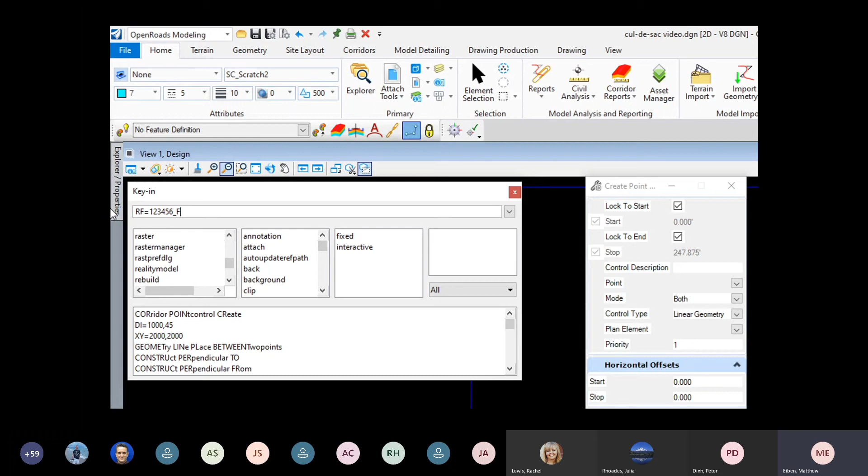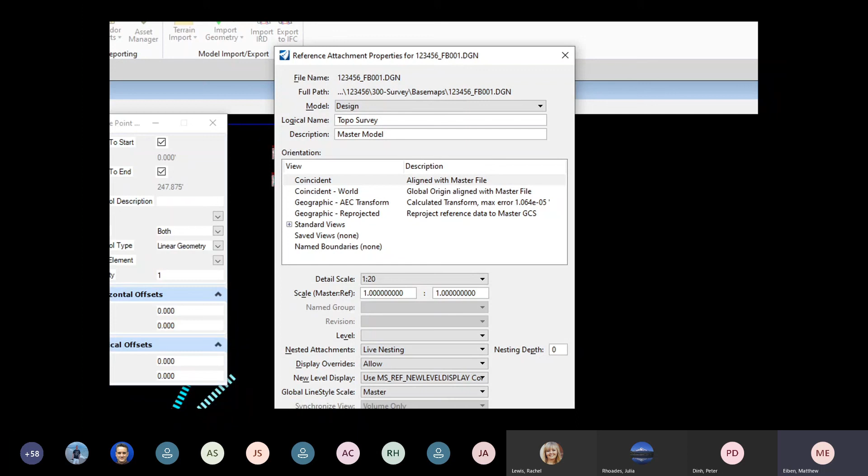So if I key in RF equals 123456, this is my sample DAR 185 project, and I do FB001.DGN. When I hit enter, I'm prompted with the attach reference dialog here. And I can click OK, but I'm going to click cancel in a second. Take a look at the logical name and the description. I can change that with my KEYIN before it's even attached. And I could also change whether my live nesting is turned on or whether I want my allow overrides on or off. All those things can be controlled at the time of attachment.

So I'll hit cancel here, and I'm going to do RF equals again. Actually, I'm going to use the up arrow, and if you notice, down at the bottom is my KEYIN history. I can select on these and it'll populate the KEYIN list again, and I could hit enter and do that, or I could just use it to start from. Additionally, if I clear that out, I can use the up and down arrows to go through all the recent KEYINs that I've had, so I can find those quickly. Even if it's docked, I can browse through my history with my up and down arrows.

So let me get back to this one, and I'm going to add a comma. And I want to make sure that I tell it I'm going to attach the fb001.dgn file, and I want to make sure it's attaching the design model. That could be handy if you have a lot of models in one particular file. And then I want to set my logical name to maybe test, and I'll give a description of ODOT. So those are all separated by commas.

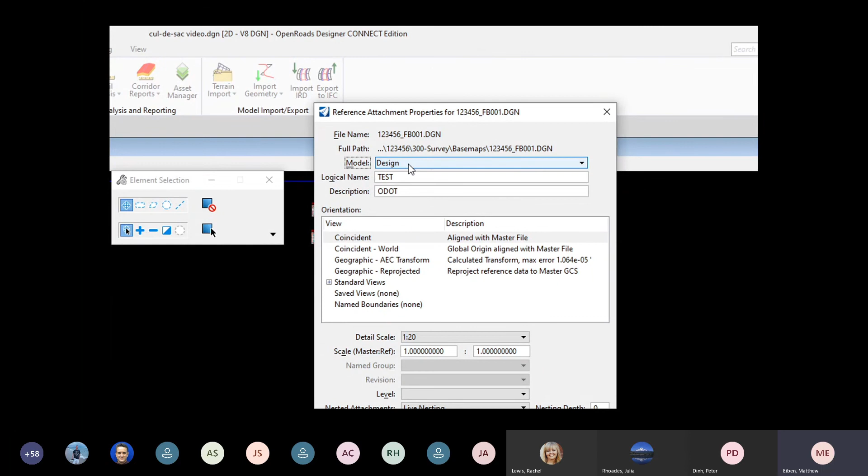Now when I hit enter, you see that my logical name is set to test and my description is set to ODOT. And I think the only model here is the design model. But if you had multiple ones, that was how that would be set. And then all I have to do is click OK, and my file should be attached. And it's way up here.

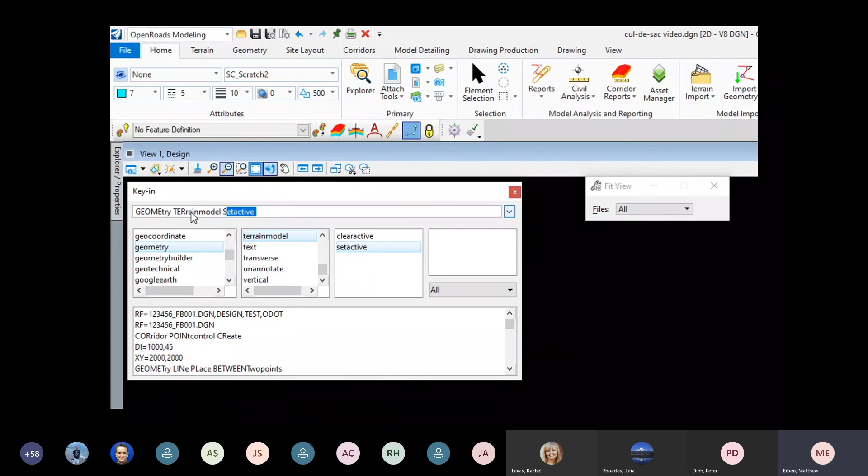There also is a KEYIN that you can use to set your terrain active. Let me key that in: geometry terrain model set active. Hit enter, and it will prompt us to locate the terrain that we want to set active. So as I said before, we could attach our fieldbook file and set the terrain active without ever leaving this home tab that we have here. Those are likely the first couple of things you're going to do when working in ORD: attach those files and set the terrain active.

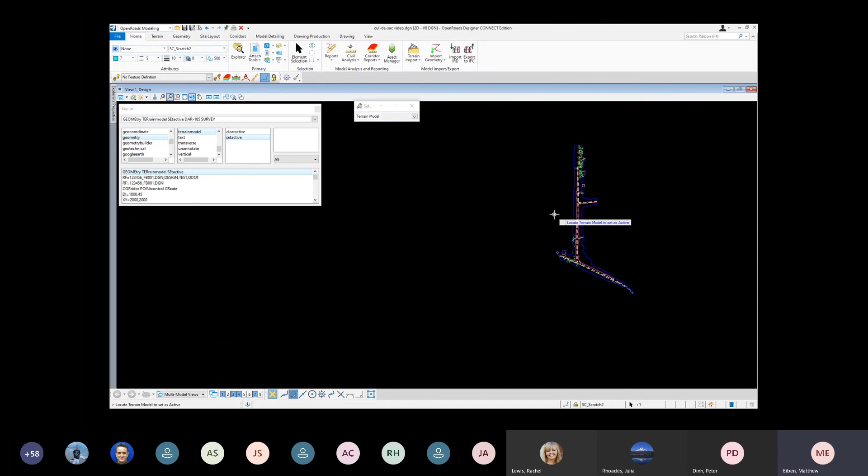What's missing, and I may file an enhancement request to Bentley, is to be able to do a set terrain active and then set the name of the terrain here. I think the name is called DAR 185 survey. I'd like to be able to tell it what terrain I want to set active without any other interaction by selecting the terrain file. So I may submit that as an enhancement request. It could probably be done with some other programming as of right now. Might add that to my to-do list and dabble in that, getting my feet wet with some VBA in the future.

So just in closing, I did not go through, and it would be impossible to go through all the different KEYINs, all the different options. But if you find yourself doing a repetitive task, or you don't want to navigate away from some of the ribbons to find something that you're only going to do once, maybe. I didn't talk about it as well as the batch process. So if we're doing the same thing in many files over and over again, we could set up a script essentially of KEYINs that we want MicroStation to process on every single file.

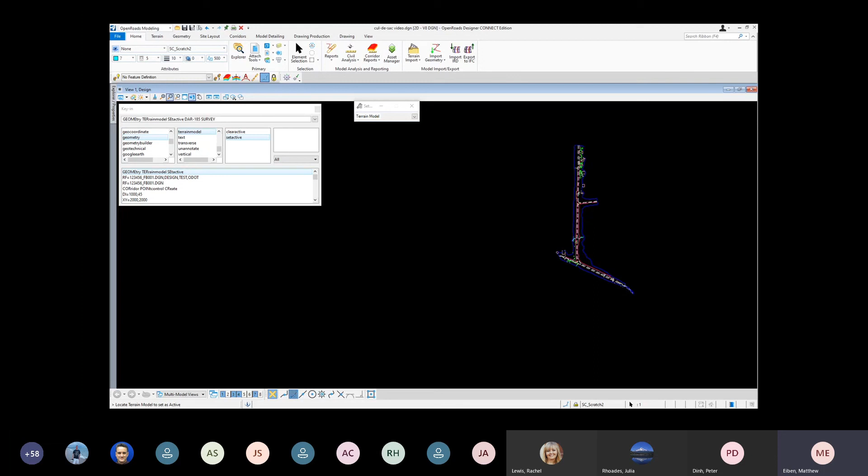So I think I've said it a couple times now. I was just trying to give you ways to enhance your workflows or maybe improve upon some things you're doing now. And this is one good way. It's sort of old-fashioned and maybe in some cases a little bit antiquated, given some of the commands that are out there today. But you'll find some of them can be very useful in the right situations. Okay, so if you don't take anything away from that, maybe using the RF equals or reference attach KEYINs will be really helpful for just attaching your fieldbook file as you create new drawings going forward.